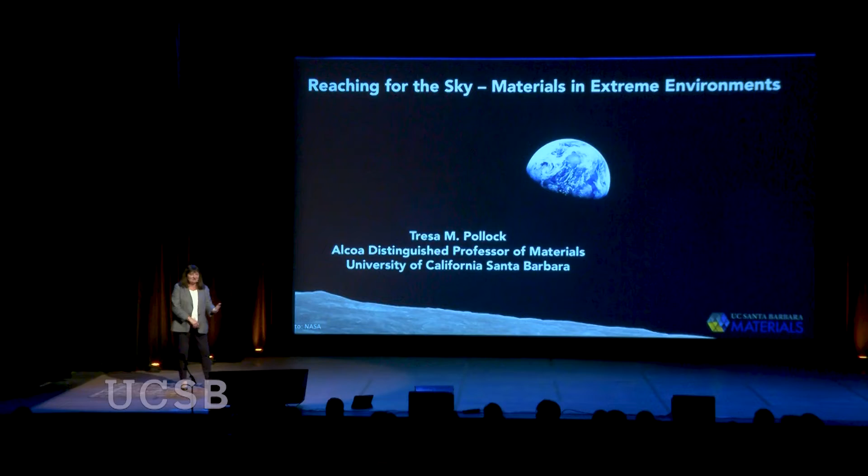I'm Tresa Pollock, and today my lecture is going to focus very broadly on the topic of exploration. I think we all dream of exploring, say, the remote stretches of the US. I personally dream of visiting every national park. Perhaps you dream of going to New Zealand for the weekend, or maybe some of you would like to actually explore another planet.

So, what keeps us from doing that? The major problem is the ability to get to these places quickly and in a safe manner. What limits us is often the propulsion. How do we get from here to there safely, and how do we improve that such that we get a chance to explore all of these places?

Exploration is with us from the earliest days of our lives. As soon as we acquire that first mode of propulsion, that would be crawling, we must explore what's behind that cabinet door and begin to build something. We have no idea what that is, but it's something we'd all like to be better at, propulsion and exploration.

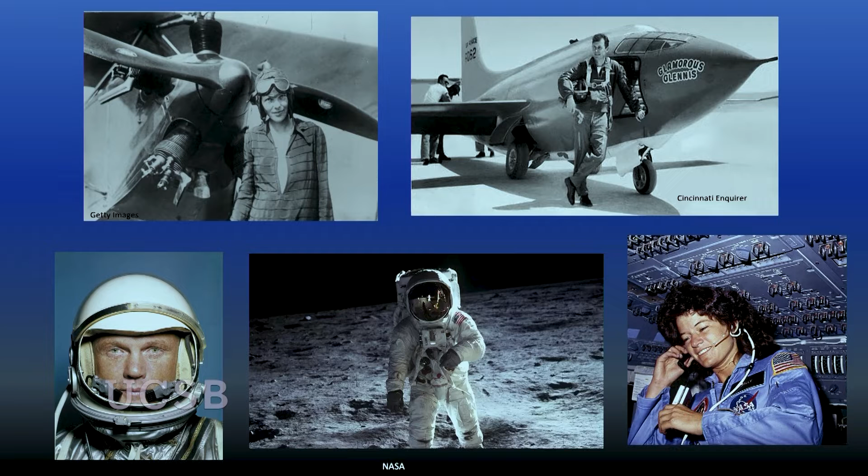Now, we have a tendency to hold in very high regard our explorers. I probably do not have to tell you who any of these explorers are, because they're all very well known, and they have taken risks to do the things that they have done in aviation and in space. But what I would like to convince you of today is that that's just the last stage. There are many exciting things to explore in preparation for the moment when one undertakes one of these feats.

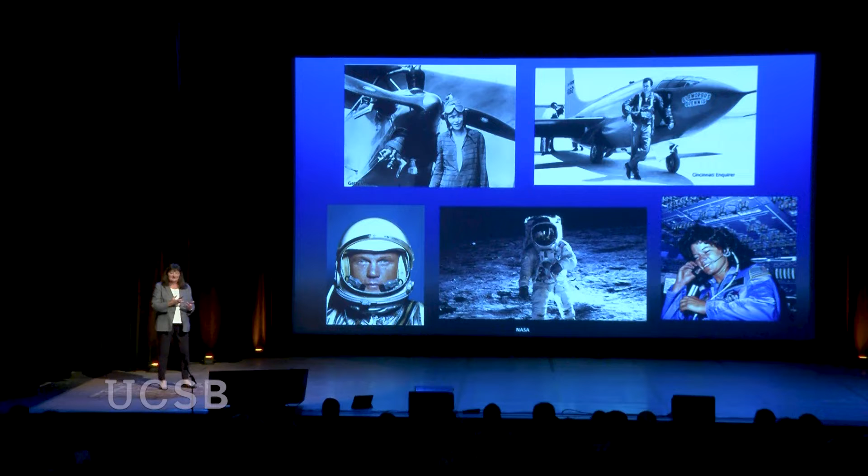What we really need are more explorers who explore science, engineering, and design. I hope today to show you some of those places that we would like you to spend more time exploring.

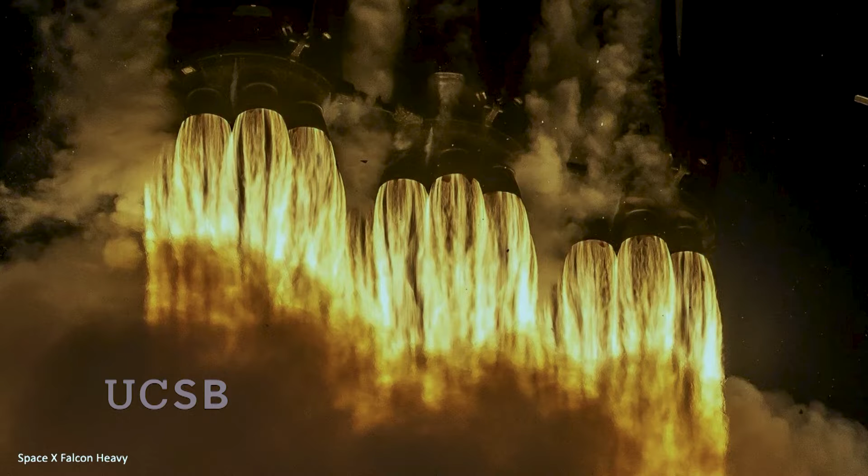Now, when John Glenn left the Earth and went into orbit, even though I'm a great fan of his—I'm from Ohio myself—I know that he was not responsible for the rocket engines that took him there. So there's a whole host of interesting people and problems behind these sorts of efforts. It takes a lot of science, engineering, design to go into orbit, to break the sound barrier, and today I would like to share with you some of the things that lead up to these sorts of capabilities.

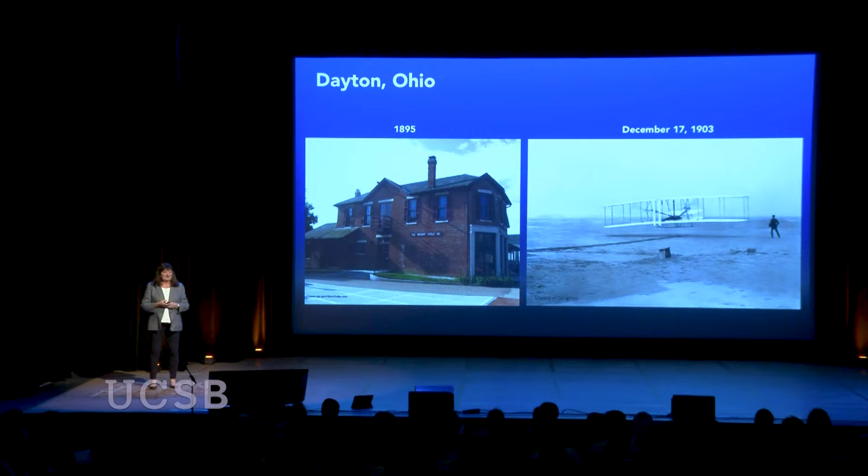Now let's go back to the beginning of aviation. As I already told you, I'm from Dayton, Ohio, which is known as the home of aviation. If you go back to the very beginning, there were two brothers, Wilbur and Orville, and they owned a bike shop. They were good engineers, but they didn't believe that bicycling was a fast enough mode of propulsion. So they decided to design and build an airplane.

I think we all know how this turned out. In the end, they were able to fly at Kitty Hawk. But what were the challenges they faced? There were two major things. They had to figure out lift, drag, and how that translated to the design of an airplane wing, which they did.

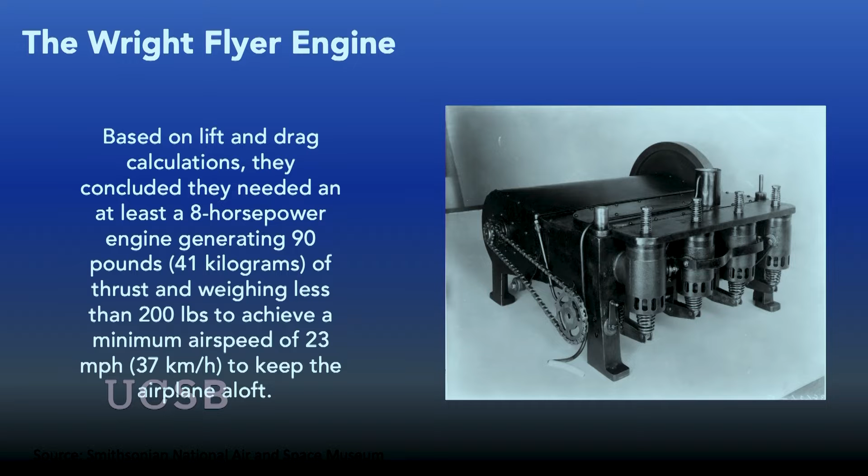Then the second, perhaps more challenging problem: once they knew that, they decided that based on the lift and the drag calculations, they needed at least an 8-horsepower engine generating 90 pounds of thrust, and that engine must weigh less than 200 pounds to achieve a minimum airspeed of 23 miles per hour. Thank goodness planes go faster than that now.

So what to do? At the same moment, the automotive industry was developing. Henry Ford was just up the street. There were people building engines for automobiles. So the Wright brothers went around and talked to them and found no solutions. And why is that? Well, because all automotive engines were built from steel.

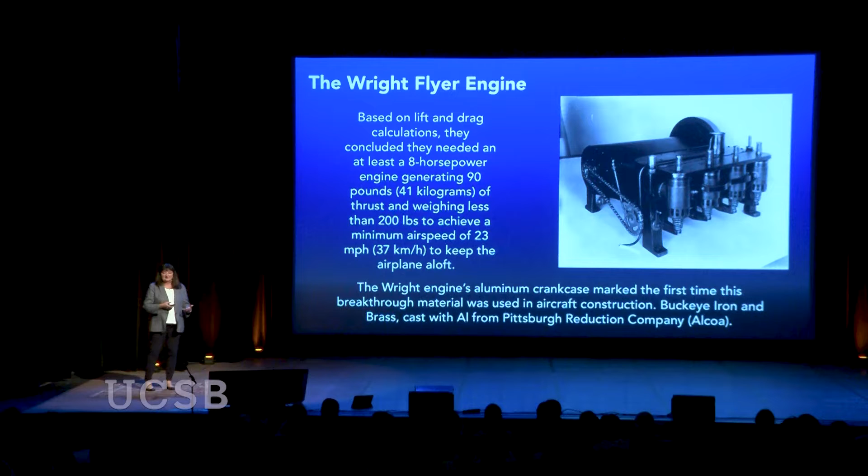And they knew that if they built this from steel, that it would be way heavier than 200 pounds. So there was this new company in Pittsburgh called the Pittsburgh Reduction Company, and they were making a brand new sort of material, aluminum, which is obviously no longer brand new, but they went and acquired some aluminum and basically set up a foundry to make castings of aluminum, and in the end, they were able to make this engine that was largely composed of aluminum and light enough to allow that Kitty Hawk flight to occur.

So there are lots of interesting problems to be solved, and then there was the final flight, which of course is what got all the publicity. Now, if we think about propulsion in its current form, probably the two most advanced systems that bring us large amounts of propulsion are, one, aircraft engines. These are on the planes that we all fly around on every day, and then rockets.

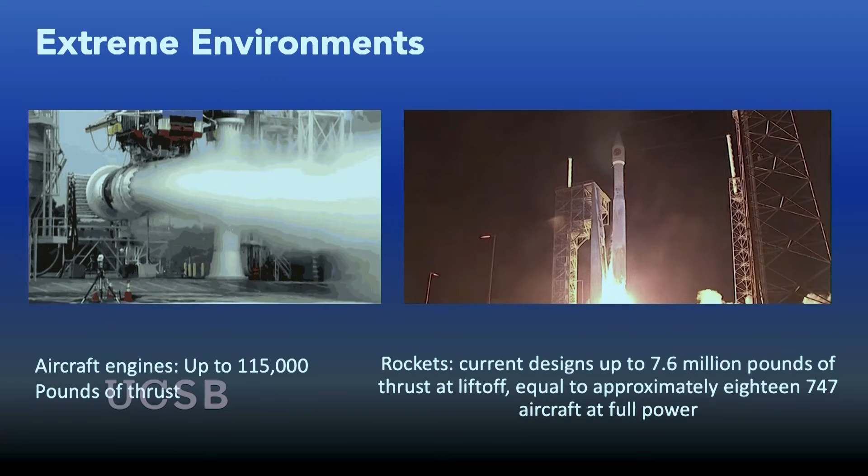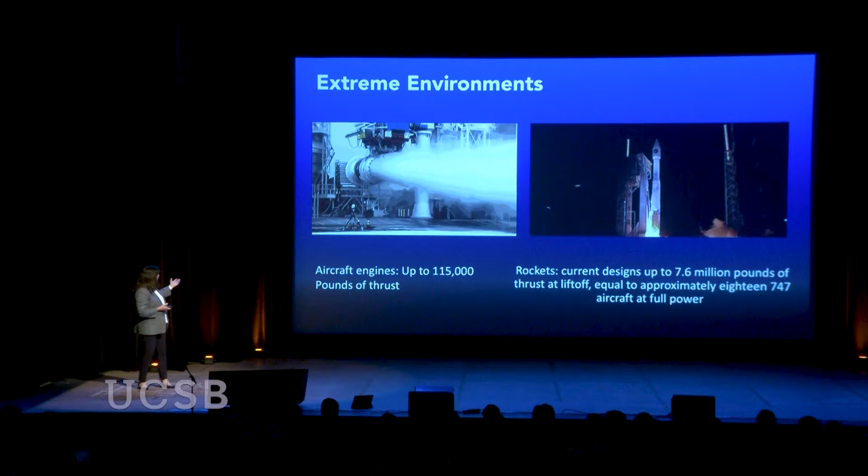And both of these systems create massive amounts of thrust by combustion of fuel, and they have a lot of challenges. You can see from looking at these movies on the left, we're just testing an engine in preparation for qualifying it for service. We have an actual launch of a rocket on the right. And these are obviously, just from inspection, very severe environments.

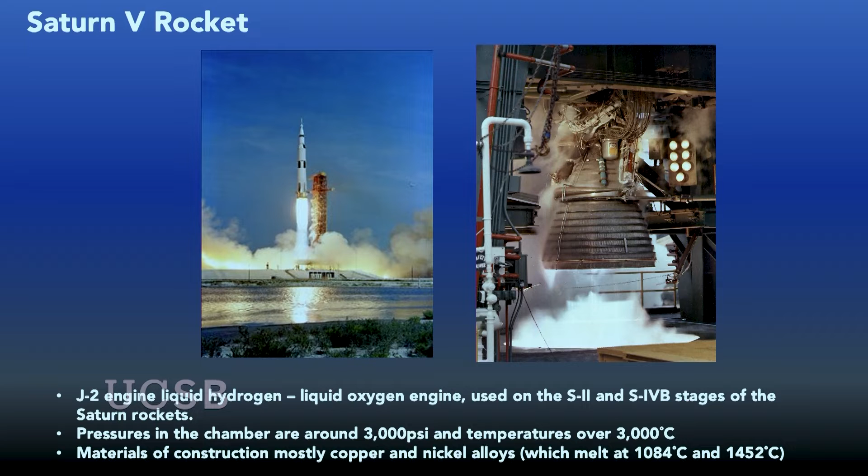Okay, the Saturn V rocket, I want to talk a little bit about both because they are different. Rockets are often fueled by a combination of liquid hydrogen and liquid oxygen. And so this is the rocket that took the astronauts to the moon. And this is a close-up of the nozzle that's producing all of this lift. And just to give you some sense of the environment, in here we have pressures of about 3,000 psi and temperatures over 3,000 degrees C. Now this nozzle is mostly composed of copper and nickel alloys, which melt at 1084 and 1452 degrees C, respectively.

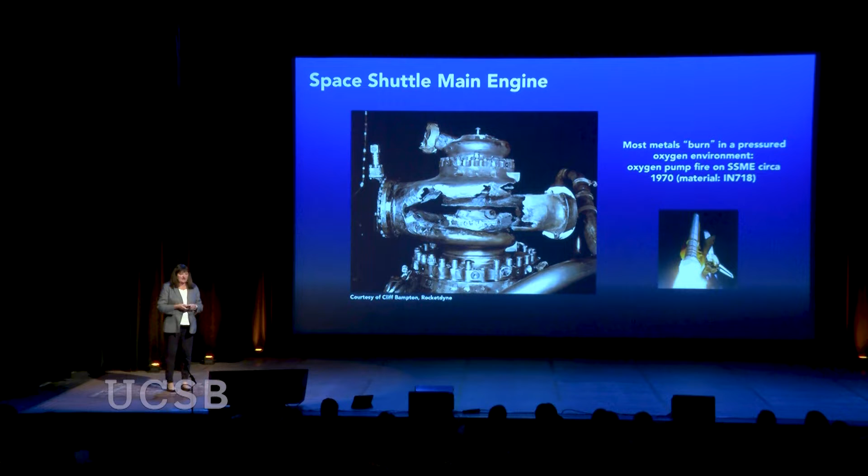If you fast forward a little bit from the Saturn rockets and the Apollo environment to the Space Shuttle main engine and more modern rockets that take off at Vandenberg, it seems like almost daily, there are different challenges as they become more advanced. And here's an example of another challenge. This is the oxygen pump that is just above the nozzle in the main engine. And you can see that after a test, this pump is completely gone. It has burned in the high-pressure oxygen environment. And so it was a major challenge to find materials that would survive in those sorts of environments to make these more advanced rockets possible.

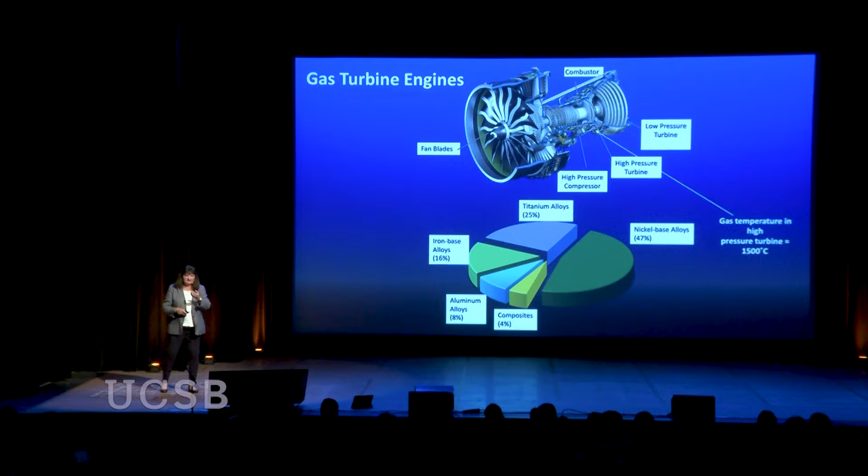In that section of the engine, the hot gases are at about 1500 C. And if you're flying, say, in a salt environment, you may have residues of various sorts that come along with that hot gas. Now, looking at the materials of construction from the front toward the back, we start with composites or maybe aluminum alloys in the fan. This has to resist bird strikes. That's one of the critical tests for an aircraft engine. You throw a frozen chicken in the front and that fan blade cannot break.

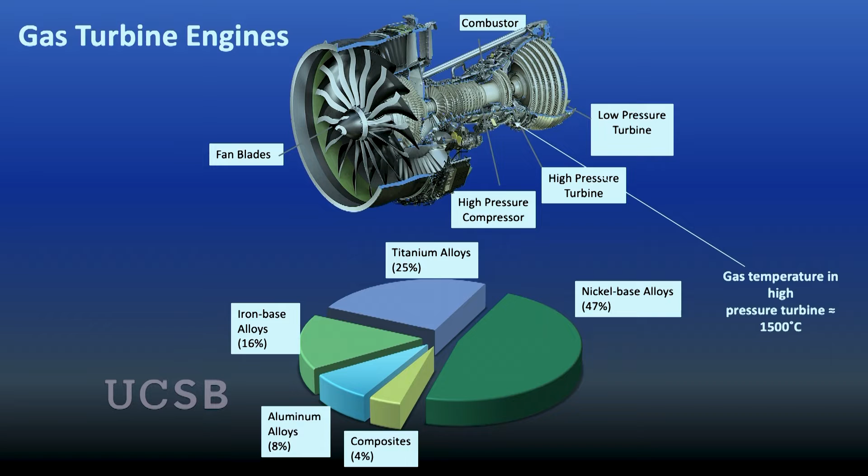Then we go on back and we have titanium alloys, mostly in the compressor. Then we combust, and then almost everything behind that is composed of nickel alloys. And the progression here is basically they have increasing melting temperatures. And so you get hotter and hotter as you go toward this high pressure turbine.

Now, as you all know, with regard to flight, commercial flight, safety is obviously the main concern. And flying is incredibly safe. I don't want anyone to think it isn't, but it needs to be so safe that we have to understand the materials in incredible detail and make sure that when and if they do fail, that we know everything about how it happened. And so here is my favorite failure. I know that seems a little weird, but it's my favorite failure because, one, nobody got hurt, and two, of the way it unfolded. And so this was an American Airlines Boeing 767 that was coming into Los Angeles in 2006. And the pilots noticed as they were approaching the runway some very strange vibrations.

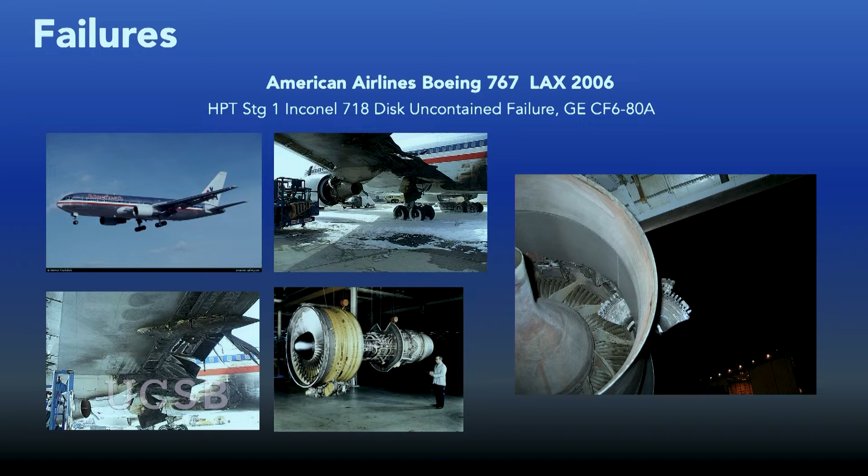They were so close to landing, they went ahead and did that. They unloaded the plane, and everyone went off to get their bags, and they rolled the plane around to the part of the airport that's remote, and they powered up the engines to full throttle, and one of the high-pressure turbine discs failed. And so you can see half of that disc right here, and you might have thought that that disc came out of this engine, but no, it came out of the engine on the other side of the plane, bounced under the plane, up and destroyed the second engine.

So that's pretty amazing. Now, the question, of course, is how could this happen? If this thing fails, that's literally the most dangerous failure you can have in an engine. And so there are detailed investigations, but the bottom line is typically in these situations, there may or may not be some tiny defect, but we develop a crack, and then every time you take off and land, that crack grows a little bit. And eventually it grows long enough to cause that thing to come apart into two pieces.

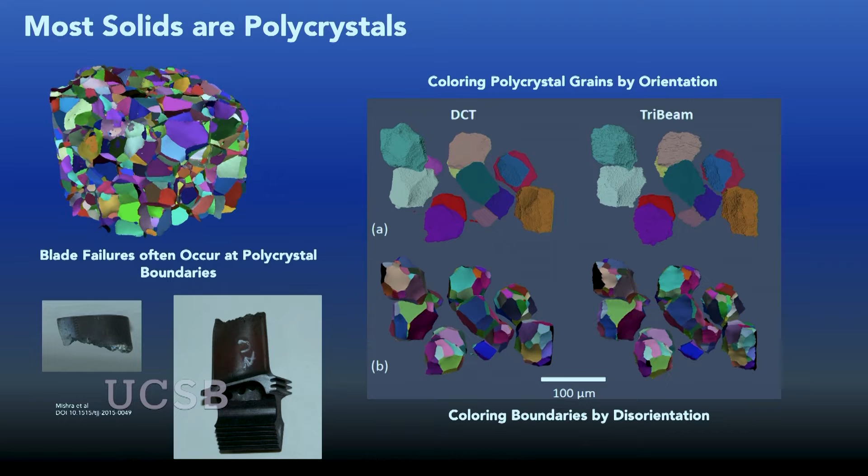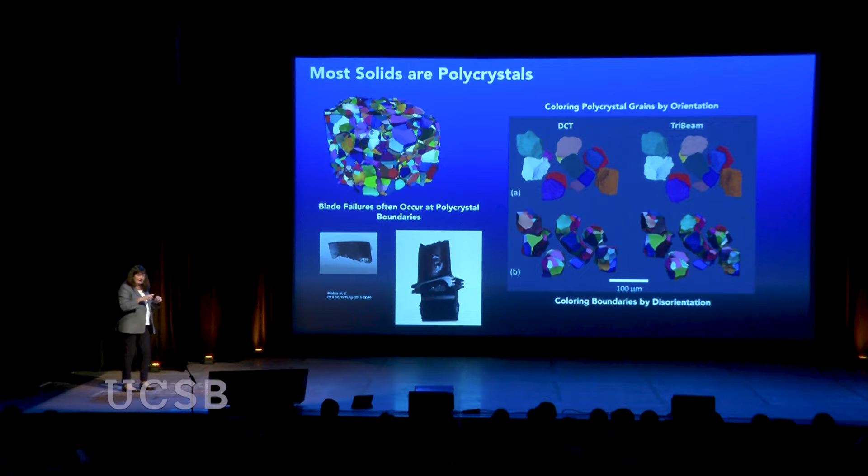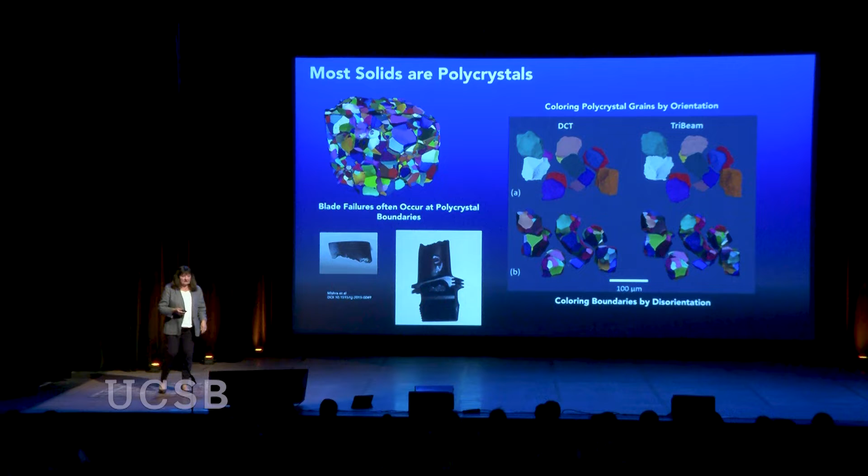And so here's an example of a turbine blade. So that would slide into that disc and rotate to generate thrust. And this failure has basically occurred by damage that develops in between these little grains that eventually joins together and causes this failure. And so, as engineers, what might you do about that? Well, this was an interesting question.

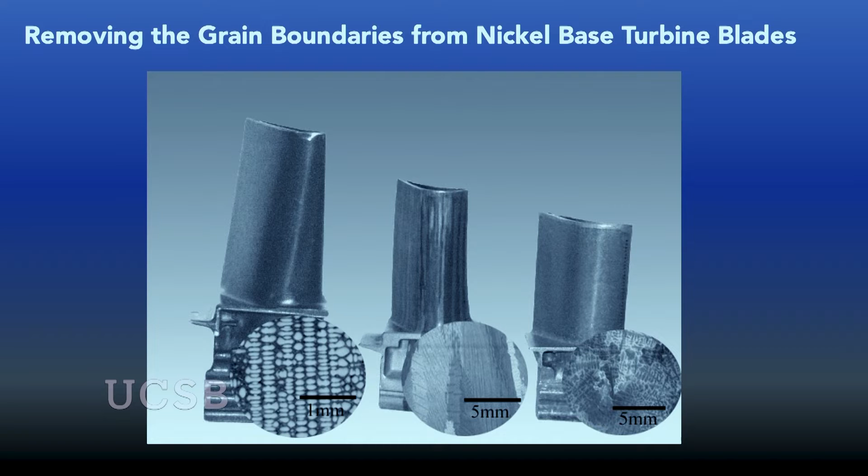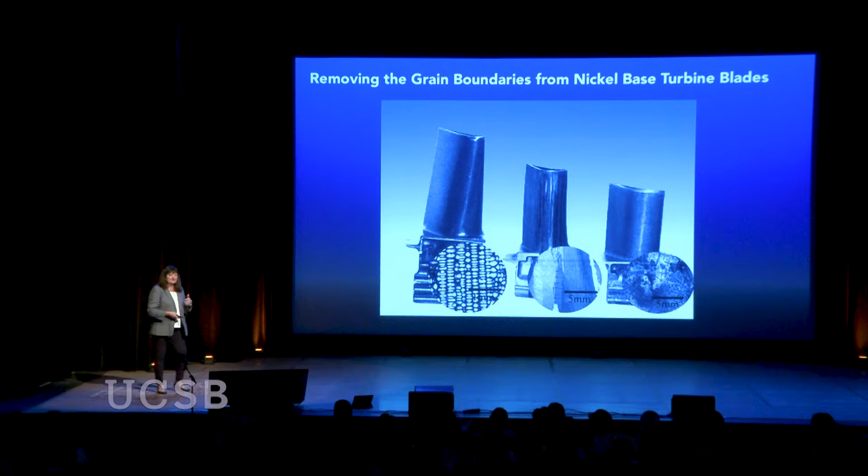Some years back, there was an engineer at GE that said, well, if the materials are failing at the boundaries, why don't we just take them all out? Let's make them single crystals, just one crystal for the whole blade. And so there was a lot of effort that went into that, and it's a little bit hard to see here, I think, but this blade is polycrystal, billions of grains. This one only has grains running up and down because it's the ones that are transverse to the axis that accumulate the damage. And this one is a full single crystal. And now about 95% of the blades produced for aircraft engines are indeed single crystals.

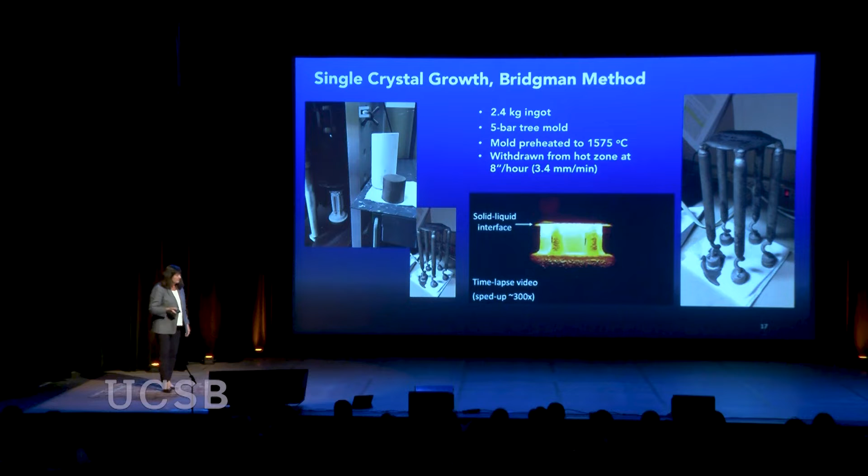Now, it's not easy to do this. This is one of the things that we do research on, and I have for many years. This gives you an overview of how you would grow a single crystal. So you start with an ingot material. There's a furnace here that you can't see very well that will be preheated to about 1575 C. Inside that furnace will be a ceramic mold, so you melt and pour material into that.

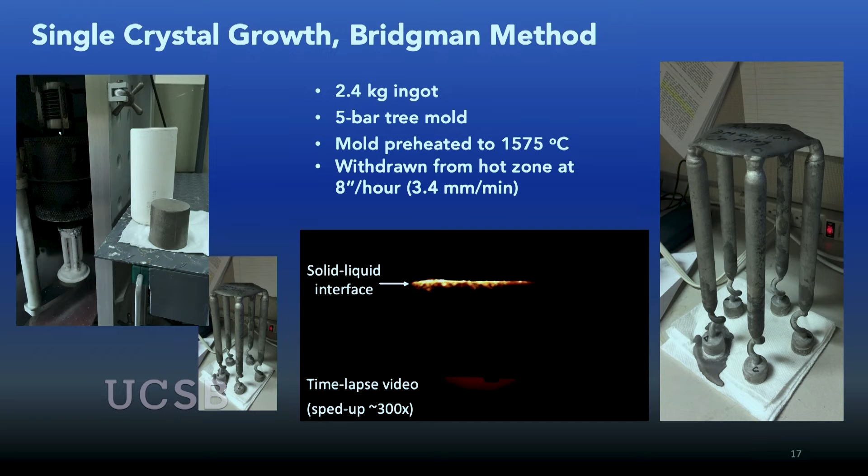And then what one has to do is withdraw from this hot furnace into the cold zone, i.e. you develop a thermal gradient right here. So all the action's right at this interface. And you can see the temperatures changing very rapidly just from the color here. This is a little bit accelerated. You have to do this very slowly at 8 inches per hour.

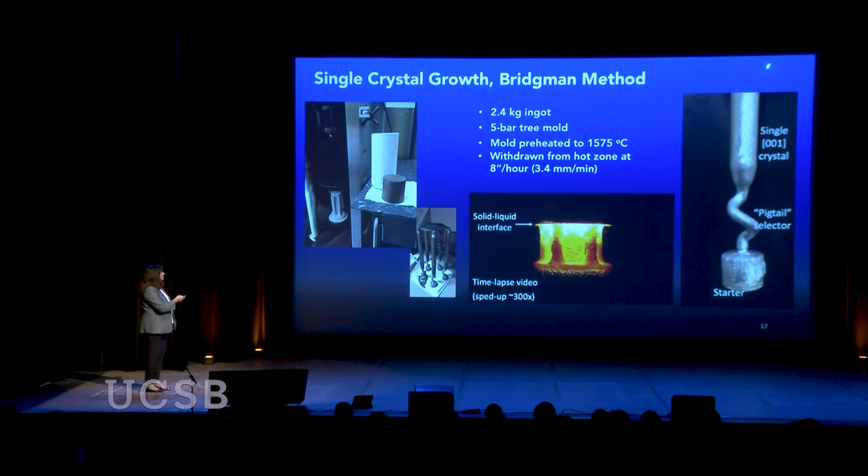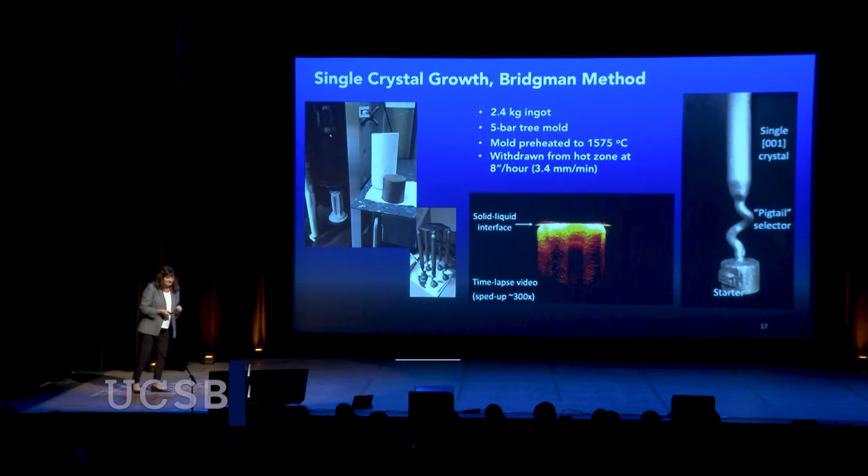And so here we're not growing blades because we're trying to do research and make test specimens. But you can see some of the tricks are in the beginning. You get a bunch of polycrystals down here, and then you force them to grow in ways such that you only have one emerging at the top. And so there's lots of details about controlling the thermal conditions here to arrive at this series of events.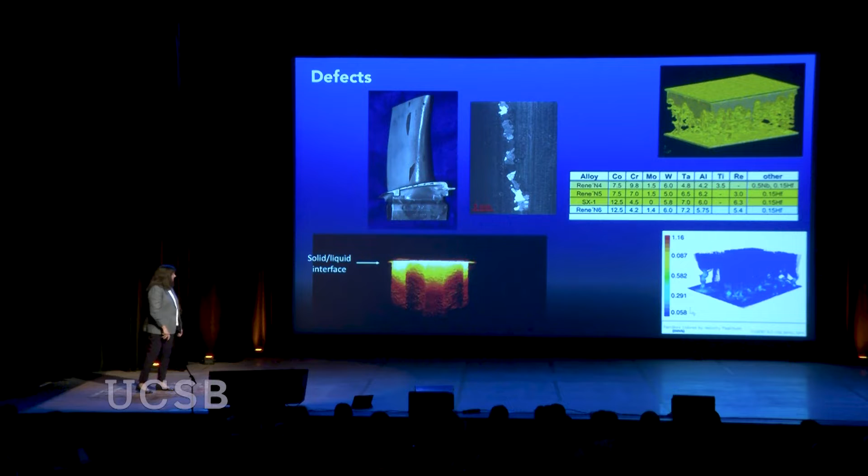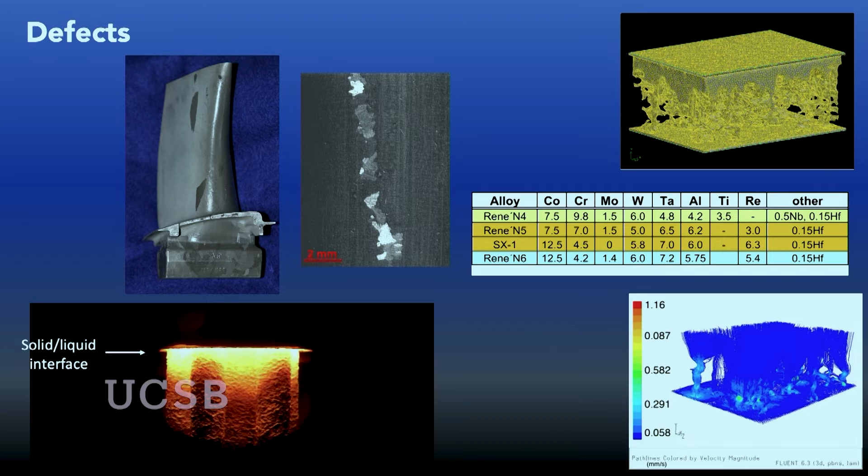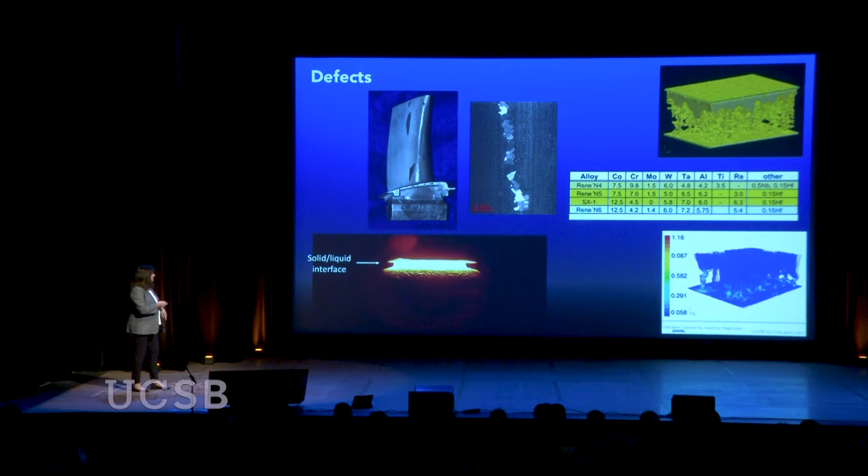And so it took actually many years and lots of very complicated characterization in 3D, not 2D, and calculations to sort out the fact that these are started by what we call convective instability. So you develop density gradients in the liquid, and that kicks off these little currents, and those little currents create grains. And so we figured out how to balance the chemistry to avoid that, and in the end, this blade could be made as a single crystal.

Okay, so there's lots of places along the way you can introduce defects and have failure. Why is it so hard? And so there's sort of two sets of reasons why it's so hard to avoid failure. There's the application environment, as we've talked about, high temperatures, the stresses, particularly cyclic stresses. We have corrosion, we have oxidation, we have joints, we have coatings, and then sometimes people don't listen, and they use the aircraft, for example, outside the design envelope. They push it too hard, and then a failure happens.

But there are also unanticipated things about the environment, and I show an example here. And this is one of those things that you never would have thought about when you were designing the material, which is, this is a photo of the volcano whose name nobody can pronounce, that exploded in Iceland in 2010. And so you can see volcanic ash coming up through the cloud layer here.

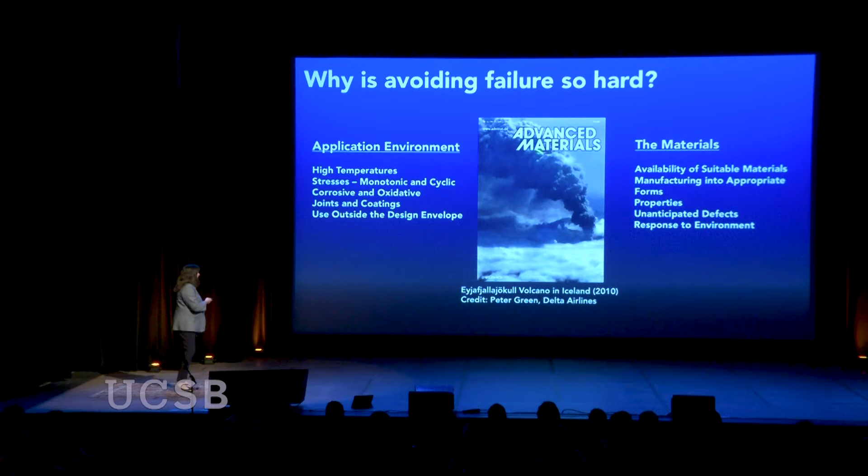And this picture was taken by a Delta Airlines pilot, a friend of mine, Peter Green. He assures me that it was a really good lens and he's not as close to this volcano as it looks. I don't know if that's true or not, but shortly after he took this photo, this whole stretch of the sky was shut down, because if you ingest volcanic ash into your aircraft engine, it will melt and infiltrate things and cause failures. So an example of an unanticipated failure.

Now on the material side, the questions are, do we have suitable materials? Can we manufacture them into the appropriate forms? Do they have the properties that we need after we manufacture them? Or do they contain defects? And then how would they respond to an environment that you can only imagine?

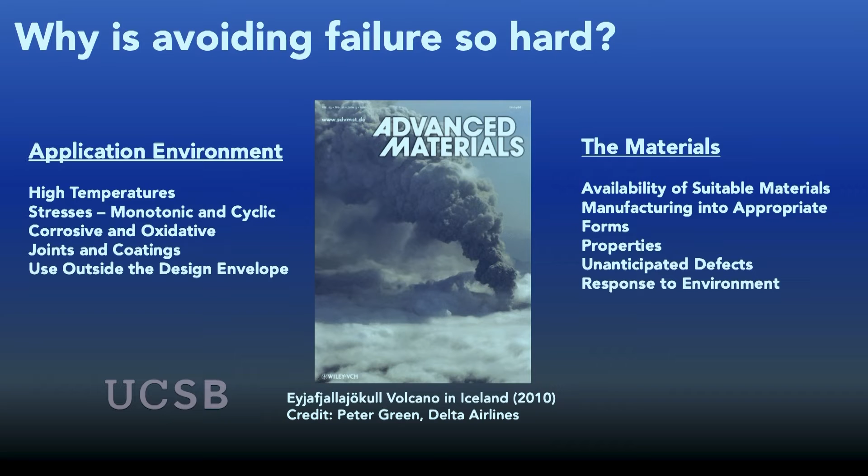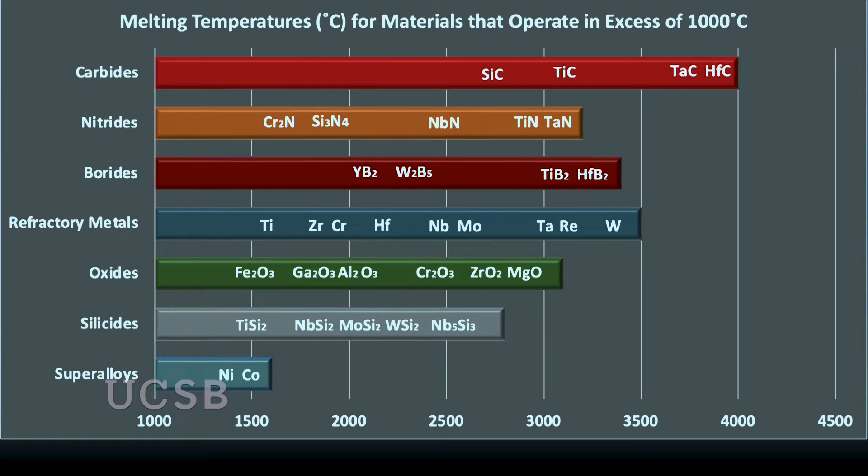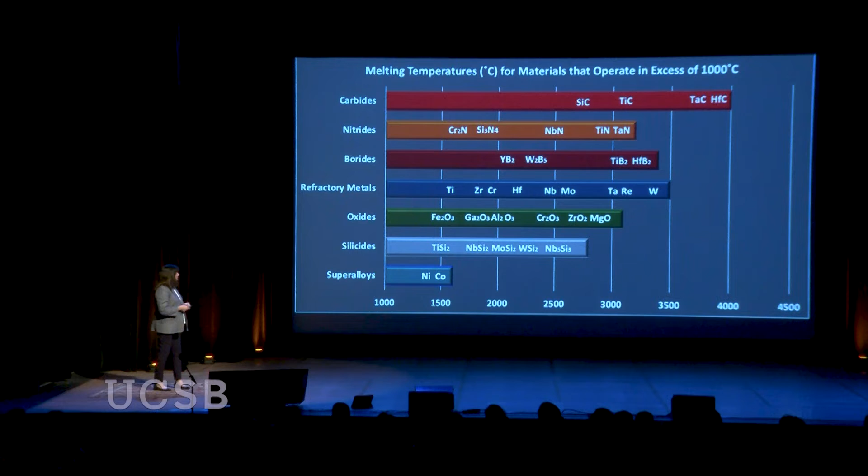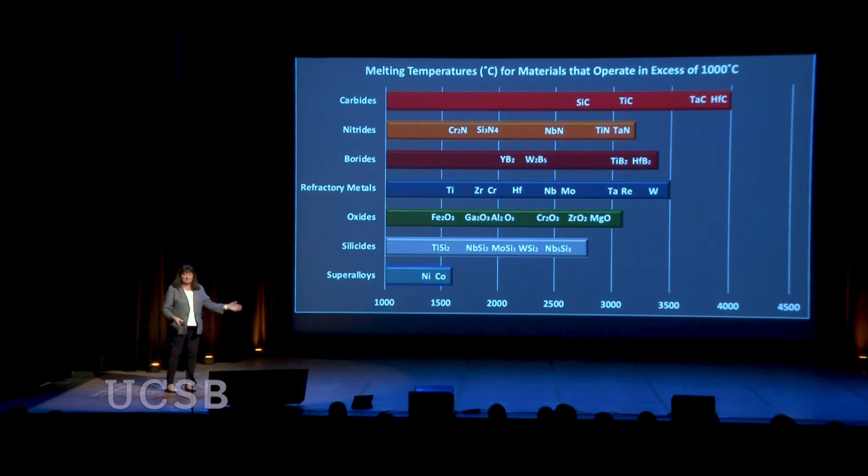Now earlier I talked about the need for high temperatures. And so I show a chart here that has the melting temperatures for all materials that can operate in excess of 1,000 degrees C. Recall I said earlier that a lot of times we're using nickel alloys, and strangely enough, they're at the low end here. And there's all these other materials that have higher melting points, and yet we don't use most of them. So why might that be? Well, there are two reasons. Probably 2/3 of these are incredibly brittle, so you can't make anything out of them. And then the others oxidize incredibly quickly so that they wouldn't survive in these environments.

And so the other thing related to that, or I guess this is a reflection of that, is to use a material in a severe environment, you don't just need one property. You don't just need a high melting point. You need a whole suite of properties for the engineered object to survive.

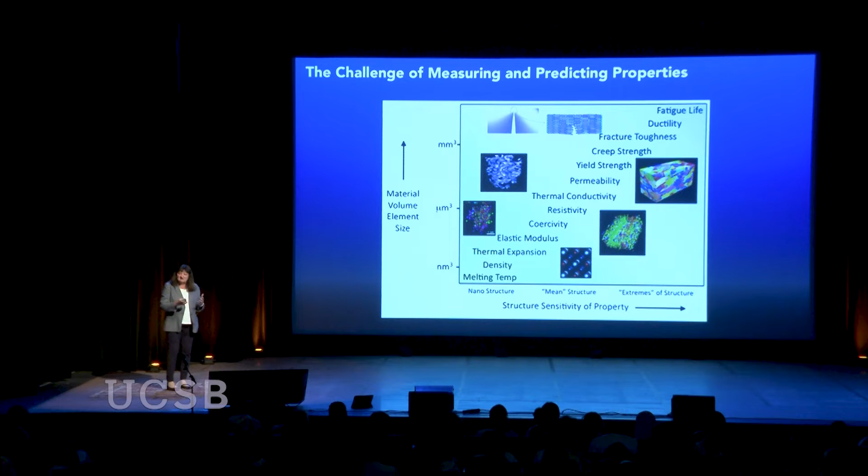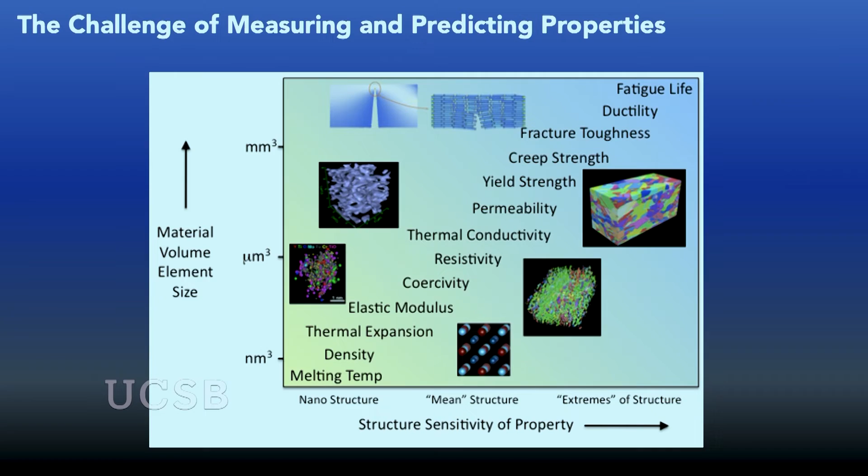And even worse than that, some of these properties, like melting, that's kind of related to the atomic structure, pretty reproducible. But other things like fatigue that cause that turbine disk failure rely a lot on aspects of structure that exist over cubic millimeters. And so now we need tons of information down to the atomic level over cubic millimeters of material. And that's very expensive from the point of view of characterization.

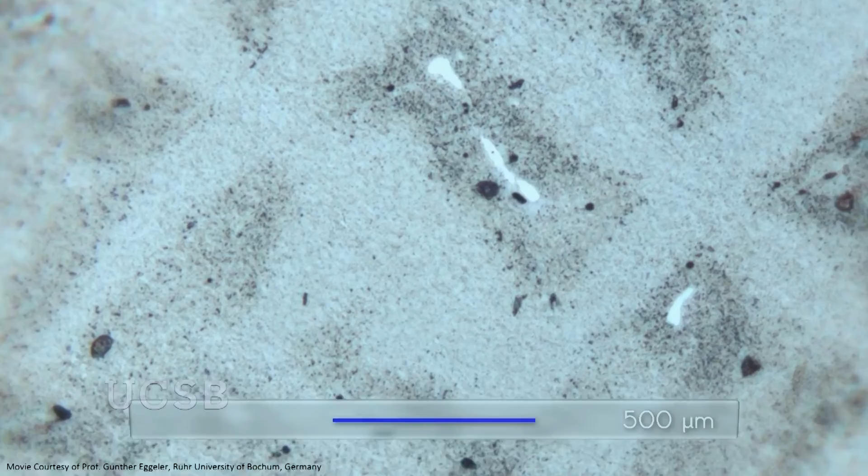So I said we have all these length scales. I want to show you a video of a turbine blade made by a colleague of mine, Günter Eggeler. You'll notice there's a scale bar at the bottom. This is 500 micrometers, 10 to the minus 6 meters.

There's a defect. This is basically a montage that fades in and out of images taken from 5 different microscopes. Here we're down to the 2-micron scale, and you can see all these blocks. These are actually a different crystal structure than the material around them. This is what we'd refer to as a 2-phase material. These blocks of material are what allow the nickel alloys to be so strong and operate up to 85% of their melting temperature.

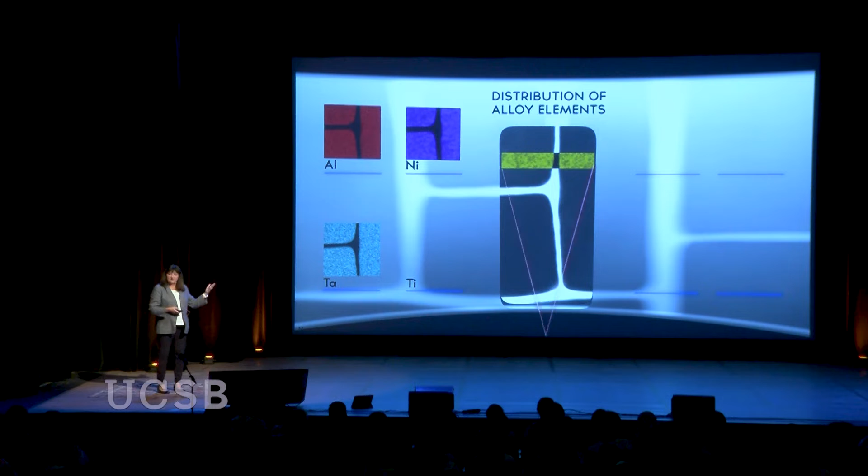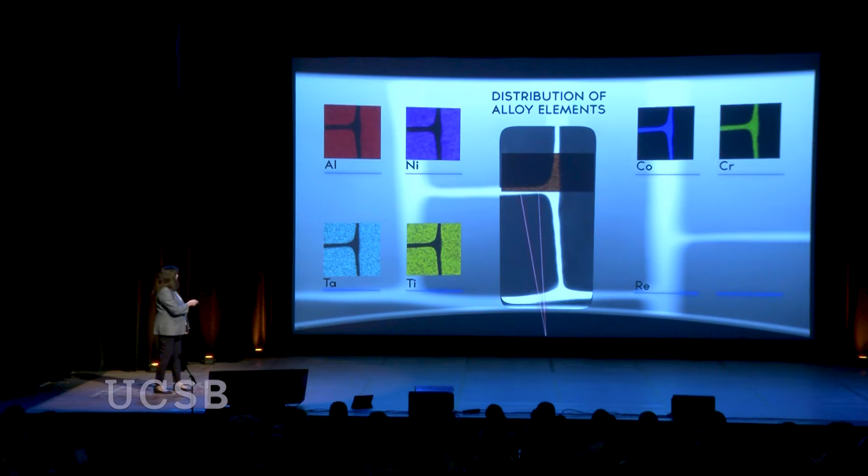Now, earlier I said we need alloys, and what we really are doing is mixing together a lot of elements, but we have to figure out which of the phases the elements go to. Everything shown brightly here sits in the blocks, which we would call precipitates. And then the cobalt, chrome, rhenium, all of those things sit in the mortar, if you will, that hold the blocks together.

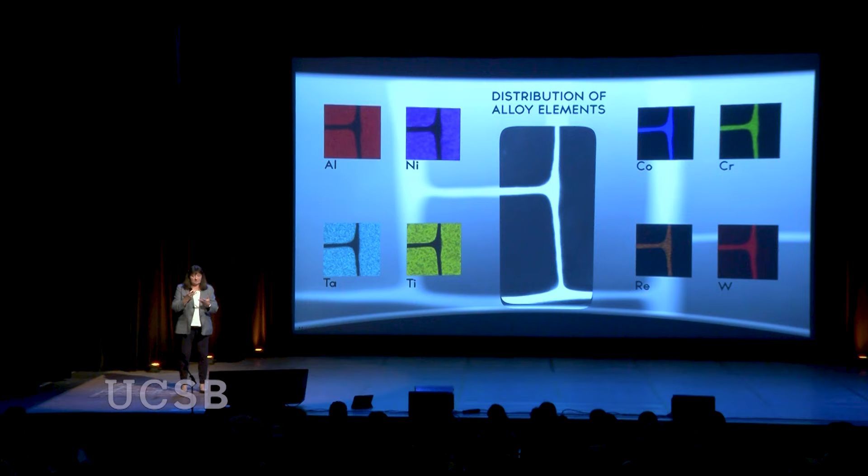So the point is we have a lot of length scales. We have to worry about chemistry, we have to worry about structure. Here now we refer to things in the micrometer scale as microstructure. Now we're going to go down to the nanometer scale and on to the atomic scale. We have a lot of different expensive microscopes to do this, but it takes a tremendous amount of time to get all this structural and chemical information. Eventually now we're getting down to imaging at the atomic scale. These are cubic atomic structures, and you can see that there.

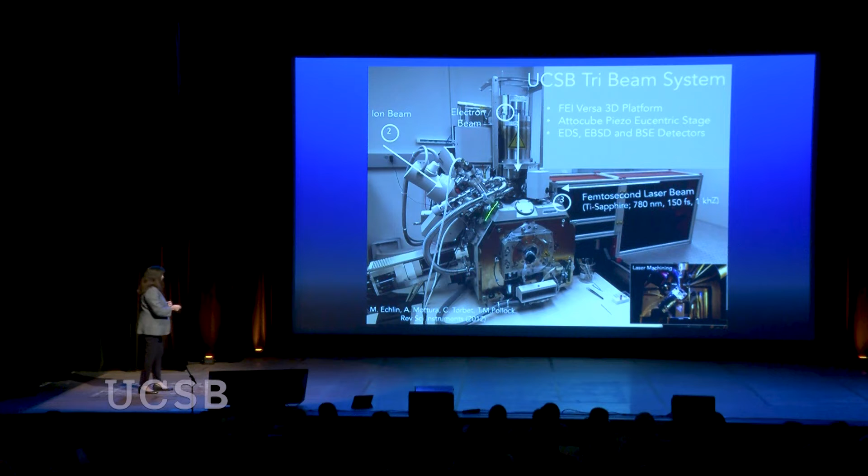Now, earlier I talked about the need for things in 3D and the fact that we need structure and chemistry. This has led my research group to build a brand new kind of microscope. We refer to this affectionately as the tri-beam system. It doesn't take too long to figure that out - it's because it has an ion beam, an electron beam, and a femtosecond laser beam. And then all this other stuff are detectors to detect structure and chemistry.

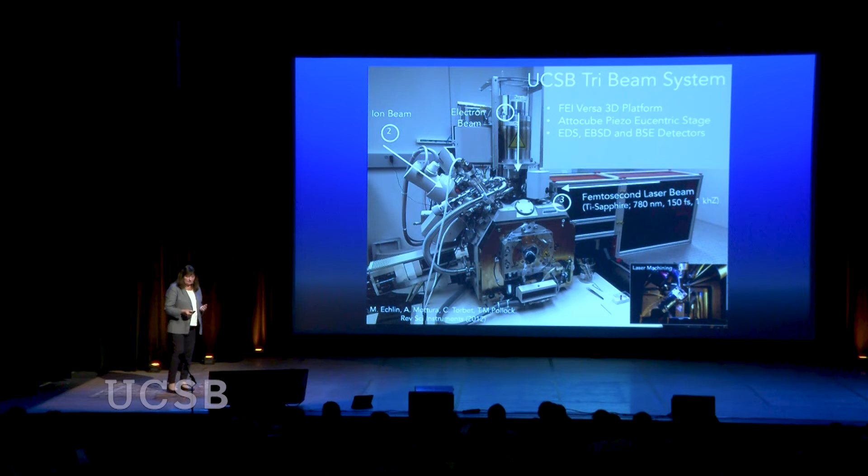Now, the role of the femtosecond laser is to serve as basically a nanometer scale knife. It will ablate a layer of material without doing damage and then allow us to get structural information. And so you can see the layers being removed in this movie.

This is an additively manufactured alloy that usually we expect most additively manufactured alloys to have a lot of defects, and indeed this one does. You can see them as we slice through the material.

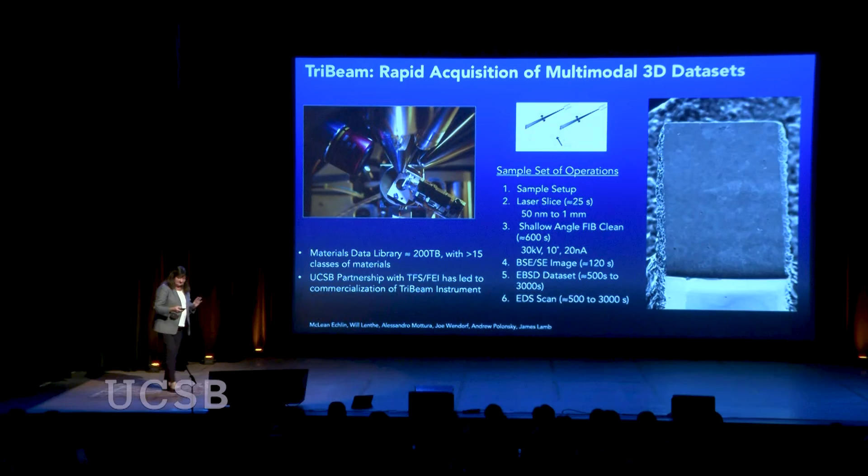This gives you some idea how long it takes. People used to do this mechanically, so we can do a slice in 25 seconds - that used to take hours. So this is very, very fast by standards of things that came before it. And now there's a commercial version, which is much prettier than the one I showed you. It's sitting in boxes in Elings Hall, waiting to be put together.

Okay, so the femtosecond laser - I don't have time to tell you a lot about this. I got the idea to do this at the University of Michigan. I used to share the hallway with Gérard Mourou, who recently received a Nobel Prize for his work on lasers. That collaborative work is what started this idea. So always talk to the people in the hallway, that's important.

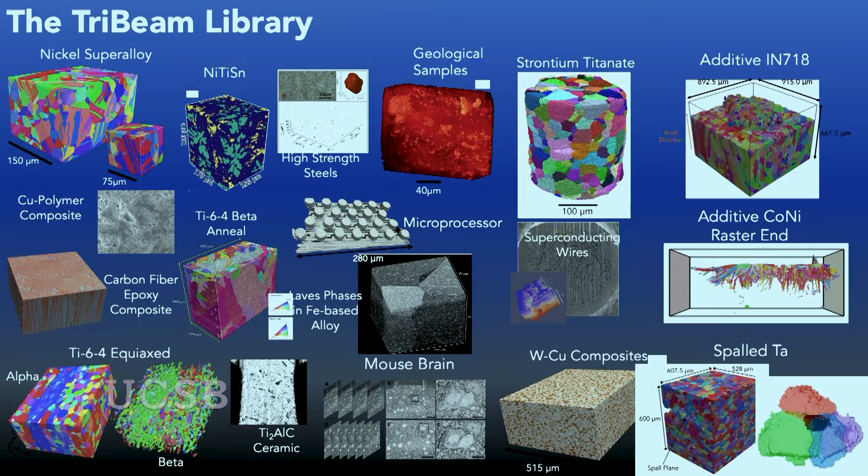Now, this is kind of a library of all the different things we've been able to make 3D data sets for. The point here is that if you can section geological materials and ceramics and metals and mouse brains, then you have a generically useful instrument that a lot of people will be interested in.

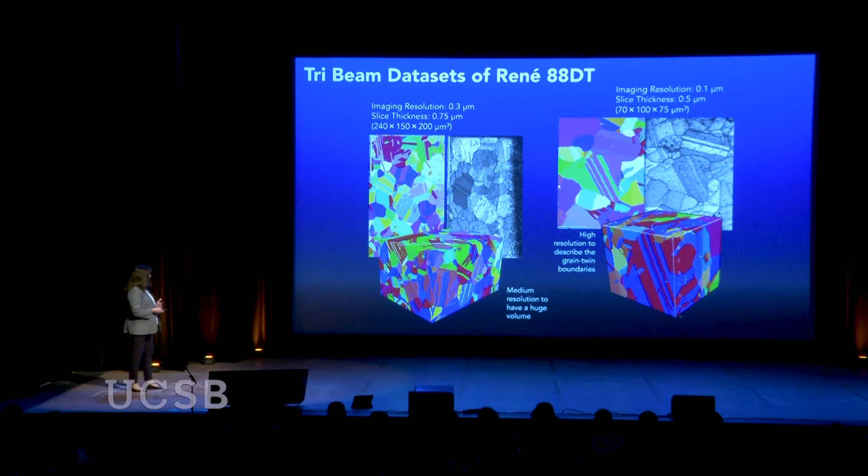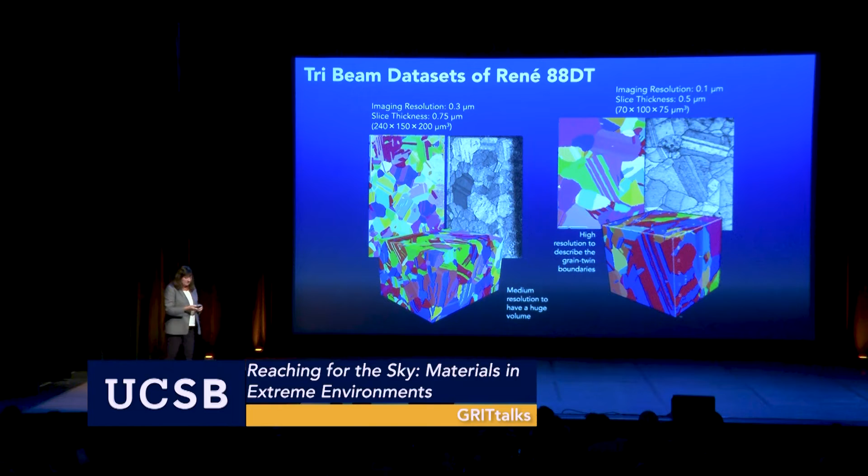So here, back to our turbine disk material, this is what the structure looks like. I just want to tell a very quick story about what we've learned from having that 3D data about this material as it relates to that fatigue failure. You can see in this structure there's all these red-blue contrast, and it turns out all these red-blue kinds of boundaries are very special twin boundaries.

They're all imaged in blue here, and they have a very special mechanical effect on the material. The thing that was surprising to us was their distribution and how they were interconnected in a way that nobody had realized before.

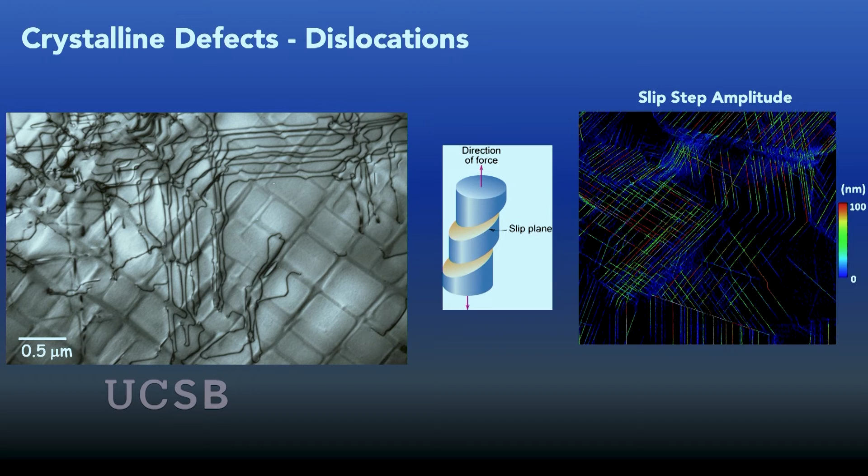This gives us a story about how defects develop and propagate. Now what do I mean by defects? Well, this is kind of a long story, you'd have to take a whole class from me. But defects, when you bend a bar, there are lots of these defects called dislocations that move through. If they get near a surface, they exit it and leave a little step. So we've developed a technique to look at all the different defects coming out of the surface and the amplitude of the displacements caused at the surface.

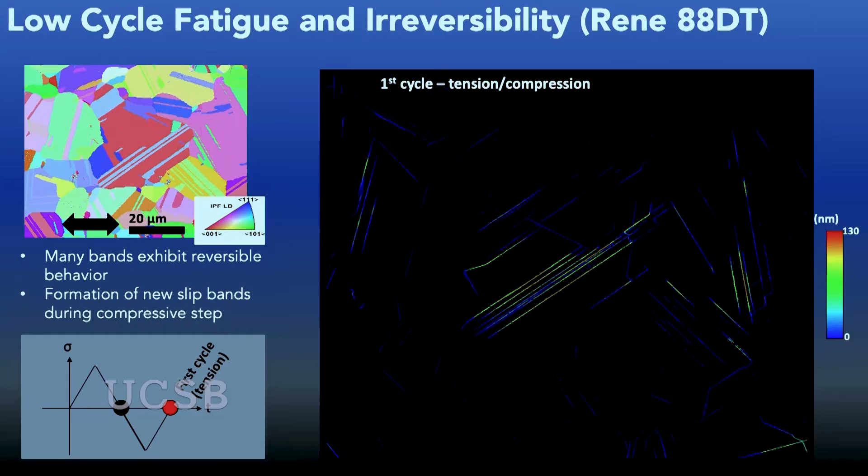Now why might that matter? I'll explain. This is an image showing two things superimposed, one cycle in tension, one in compression. If you go tension zero, compression zero, you should be back to where you started. But in fact, some of these defects, because they exit the surface or get stuck, don't go back to where they were. These special regions that persist and are irreversible are basically the source of tiny cracks that start, and that have nothing to do with extrinsic defects - it's just part of the material itself. So a big mystery solved in this case.

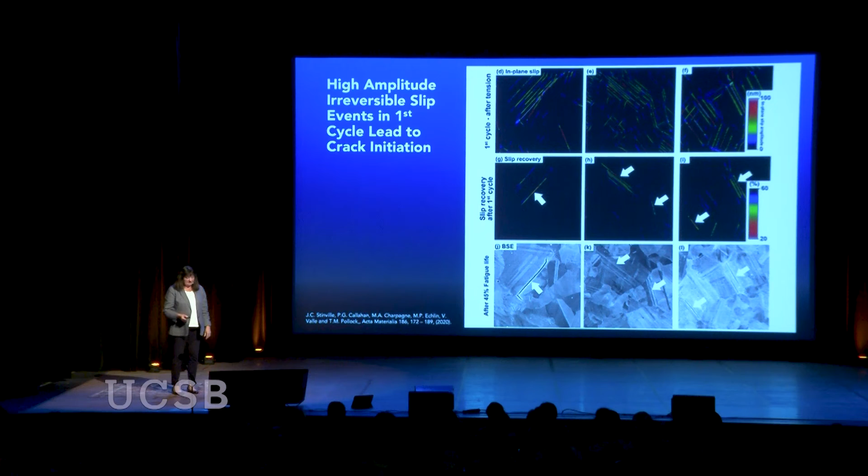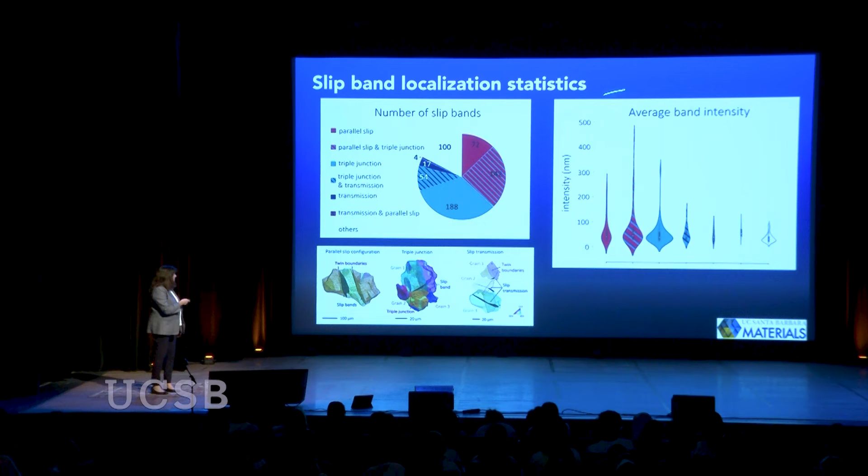Now, the other thing the 3D data allows us to do is look at all these crazy, complicated clusters of grains and how they act together to allow that crack to continue to propagate, and to get statistical information about which is the most intense one and which configuration will give us a crack.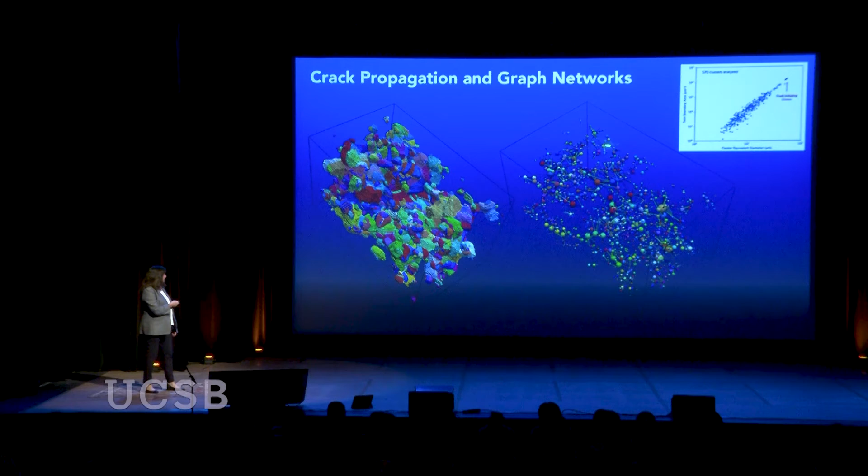And there are lots of other things you can do. In this particular case, what we're trying to do is say: if we know a crack starts here, for example, how will it propagate through the material, and how will that result in a big macroscopic crack? There are lots of questions that can be answered if you have this level of fidelity of 3D data, and artificial intelligence and machine learning techniques are giving us a new opportunity to use that effectively.

Now, another thing we've done - we're very impatient people, so for this fatigue process, every landing cycle, we've found a way to speed this up by testing at 20 kilohertz. So now what used to take us months or years to get the information, we can do in days.

Connecting this kind of fatigue macroscopic information to this very local information, what we've discovered is we can just get this very local information in one cycle and predict when a material will fail - at what strength or cyclic stress the material will fail in one billion cycles from now. Very exciting times from the point of view of being able to predict what will happen next.

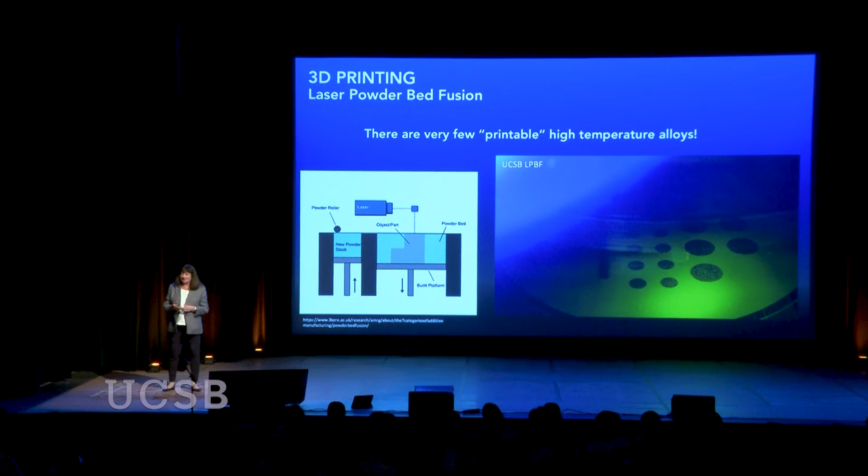My very final point: we have all of this 3D capability now at the same moment when 3D printing is becoming a very, very important thing for propulsion, both aircraft engines and rockets. I think you all know how 3D printing works - you drag some powder across, you take the laser, and in the pre-programmed part, you make it dense.

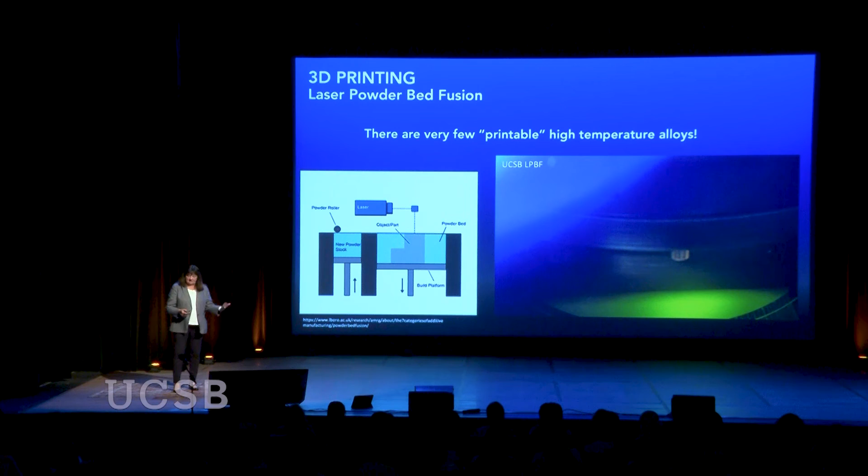And again, by making those 3D data sets, we can understand how to change the parameters of these systems and achieve the structure that we want, and to achieve new designs of alloys that can actually be printed without cracking. So that is the topic of much of our current research, both on the aircraft engine side as well as on the rocket side.

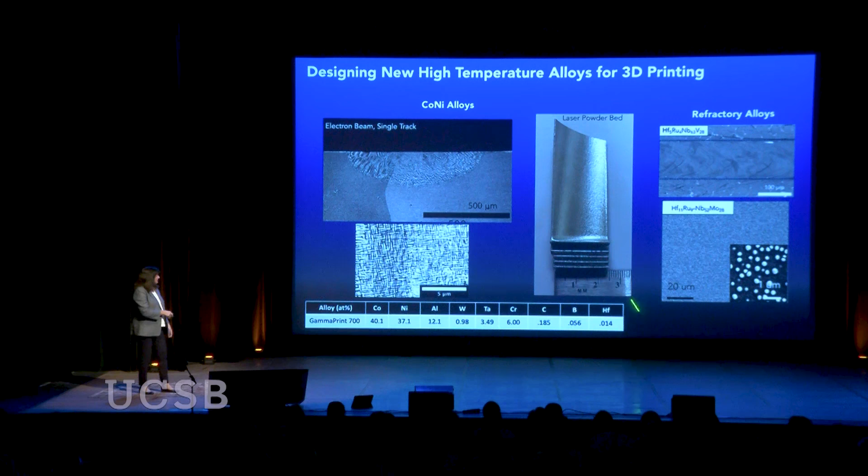So I hope that I've conveyed there are a lot of places you can explore. Some of them are at the nanometer and micro scale, and there are many, many interesting challenges standing in front of us.